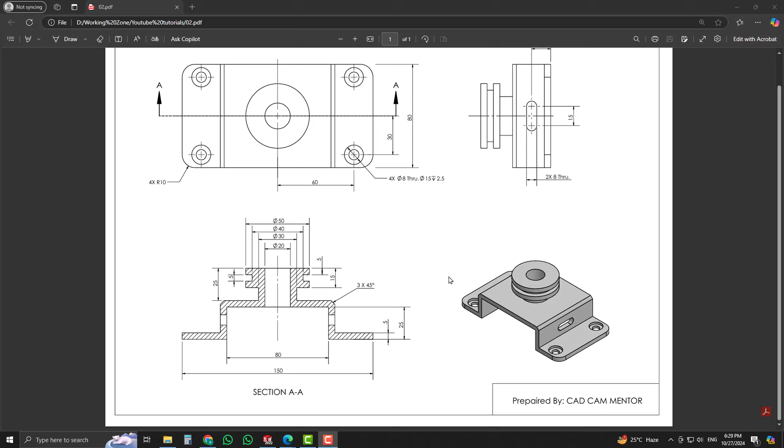SolidWorks 12th lecture. In this lecture, we will draw this simple 3D part with the help of 2D views. First of all, when we look at its isometric view, you can see the support plate. First we will draw the support plate, then we will draw a circular member, then a slot, and finally counterbore holes.

To draw the support plate and the circular member, all of the dimensions are given in that section view, so we should start from there. First, in SolidWorks, start sketching on the front plane and draw a center line like that.

Now we will open the 2D drawing. Here you can see an 80mm dimension from this line to this line, and 150mm dimension from this end to this end. This center line shows that both sides are symmetric, meaning 40mm here and 40mm here. Similarly, for the 150mm, both sides of the center line are symmetric.

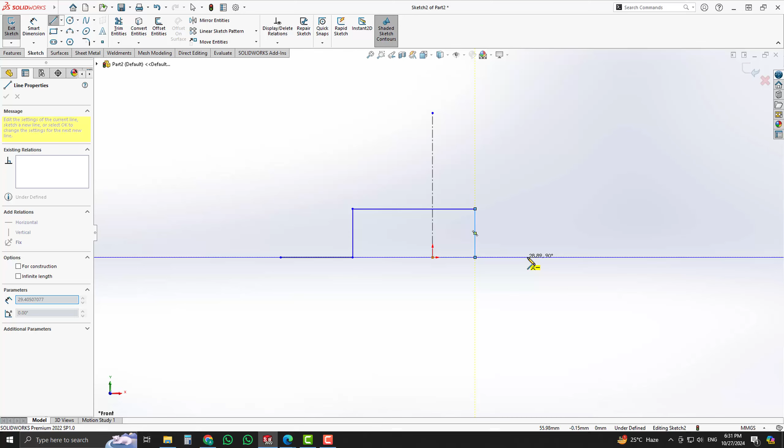Now in SolidWorks we will draw a sketch. First, remember that the starting point of the line should be horizontal with our origin point. Now we will place a sketch like that. First we will place a dimension using smart dimension.

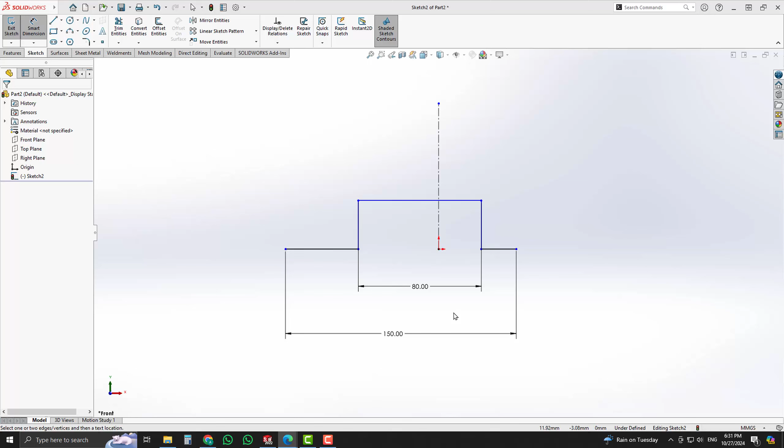From here to here, the dimension is 80mm. After that, from this end to this end, the dimension is 150mm. When we look at the 2D drawing, the distance from this line to this line is 25mm, so we will apply a 25mm dimension from here to here.

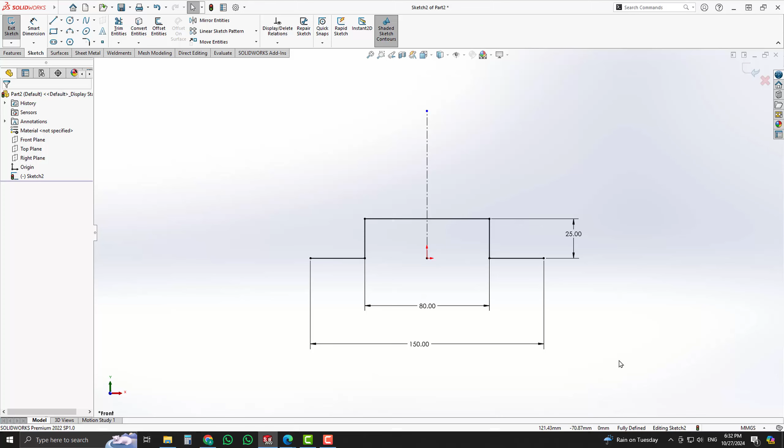Since we have to make these two lines symmetric with the center line, select these three lines by pressing Ctrl and assign a symmetric relation. Similarly, select these two endpoints and the center line and assign a symmetric relation. Now our sketch is completed, and you can see it is fully defined.

Now select the extrude boss base option. As soon as we select it, the thin feature command is activated at the same time. We will reverse the direction, and enter the thickness mentioned in the 2D drawing, which is 5mm. The second thing is how much to extrude it.

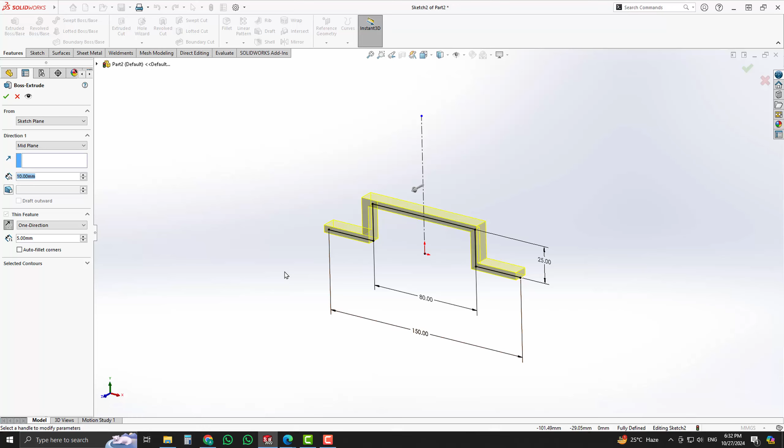For that, we can see in the top view the extrude height is 80mm. In SolidWorks, we will select mid plane so the extrude length in both directions remains the same. Now enter the value 80mm and click OK. Now you can see our support plate is ready.

After that, we will create a middle circular feature. All of the dimensions for that are given here. For making that feature, we will draw a sketch like that in SolidWorks.

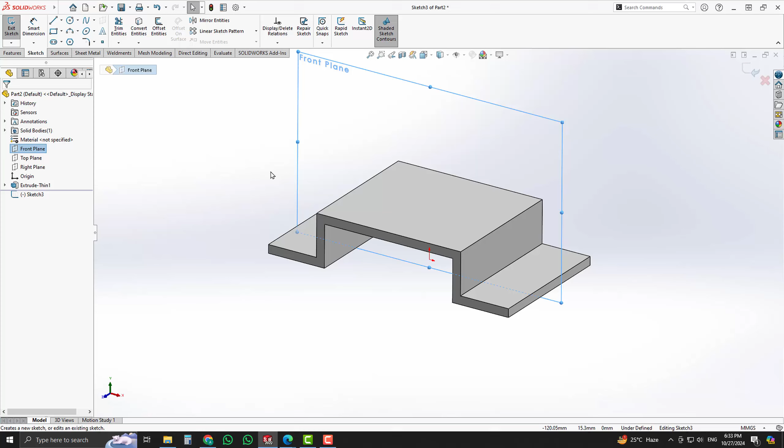Now in SolidWorks, start sketching on the front plane and set the view to the normal position. Again we will draw a center line like that. Select the line and start sketching like that.

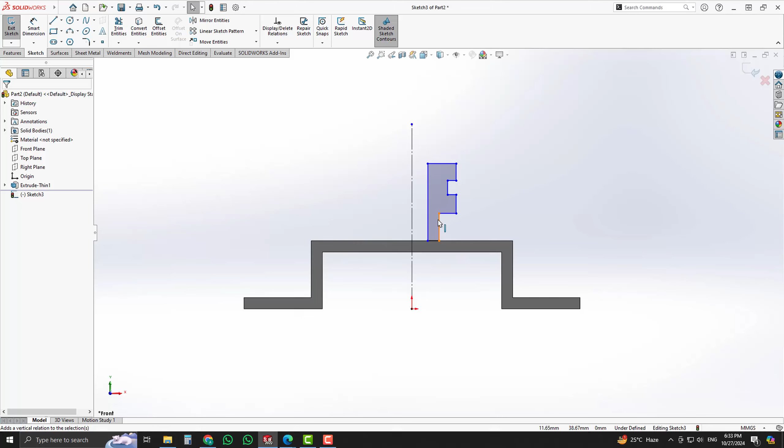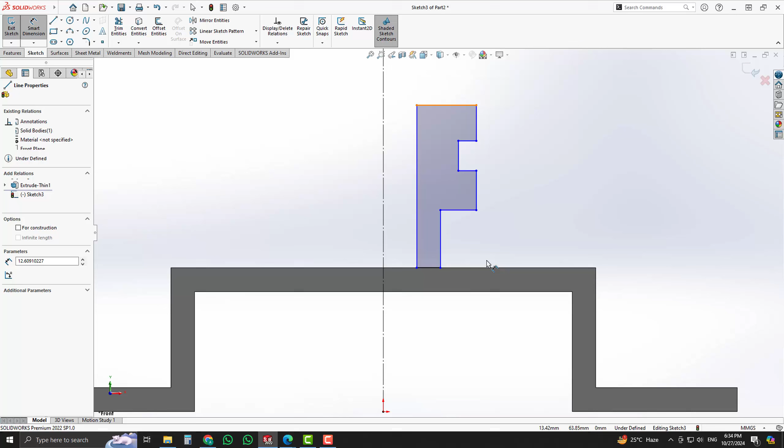Now we have to place dimensions. When we look at the 2D drawing, we know that the 25mm dimension is from this line to this line, and the 5mm line height is mentioned here. That line is 5mm only, and the overall dimension is 15mm.

Now in SolidWorks we will place dimensions one by one. From here to here is 25mm only. From here to here, the dimension is 15mm, and this line is 5mm. Now pick these two lines and assign an equal relation.

Now you can see all of the diameters, 20, 30, 40 and 50 millimeters, are given here, and we will apply these diameters. You can see when we take a dimension from the center line, on this side the dimension is in radius form, and on the other side of the center line the dimension is in diametric form.

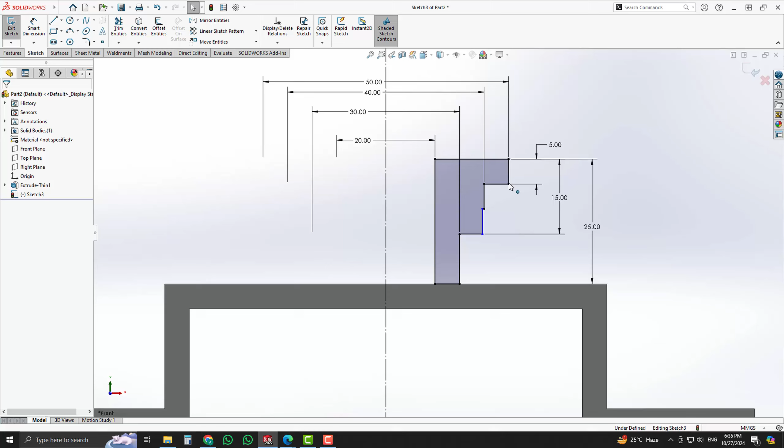Now we will place a dimension in diametric form. The smallest diameter is 20 millimeters, after that the diameter is 30 millimeters, then 40 millimeters, and the final diameter is 50 millimeters. Now you can see these two lines are not collinear with each other. To make them collinear, just select both lines and assign a collinear relation.

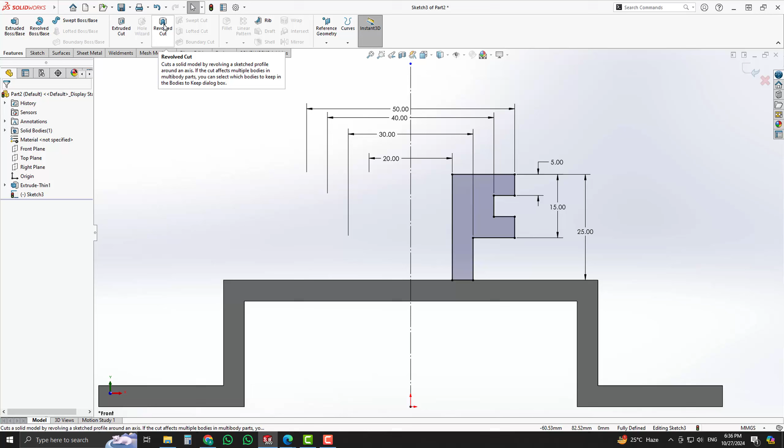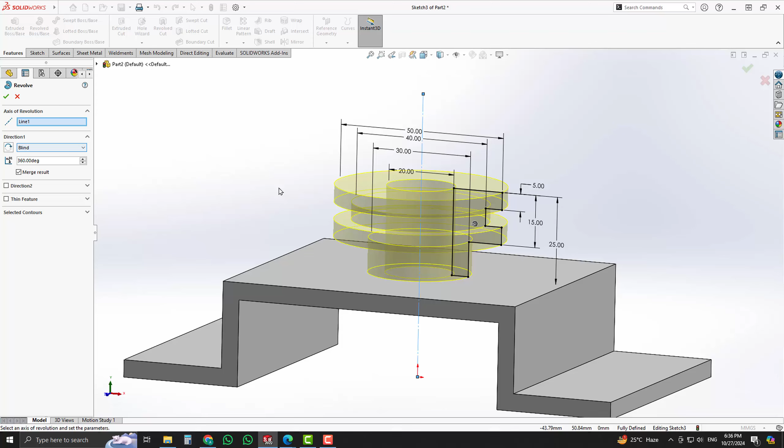Now we will revolve that sketch by using the revolve boss base command along the center line. As soon as you select revolve boss base, our geometry is created successfully along the center line. If you have only one center line, it will select automatically by default, but if you have multiple lines, you have to specify the center line as the axis of revolution for the sketch.

Now you can see our central round part is completed. When we look into our 2D drawing, we know that this hole is through, so we have to cut this hole thoroughly with the help of extrude cut, sketching on the face.

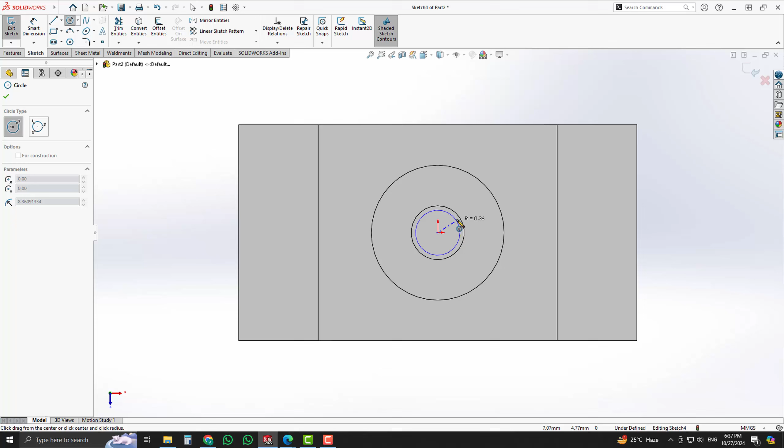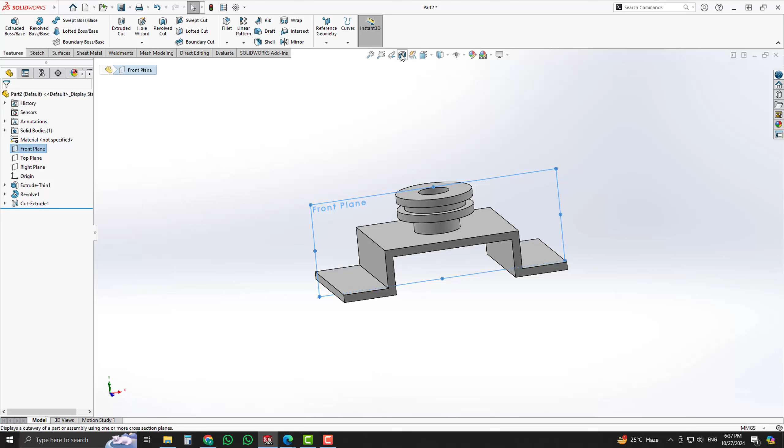Set view to normal position, select the circle command and place it here like that. After that select the extrude cut option, and under direction select up to next. Now you can see the hole is cut thoroughly. We can also look at that with the help of section view.

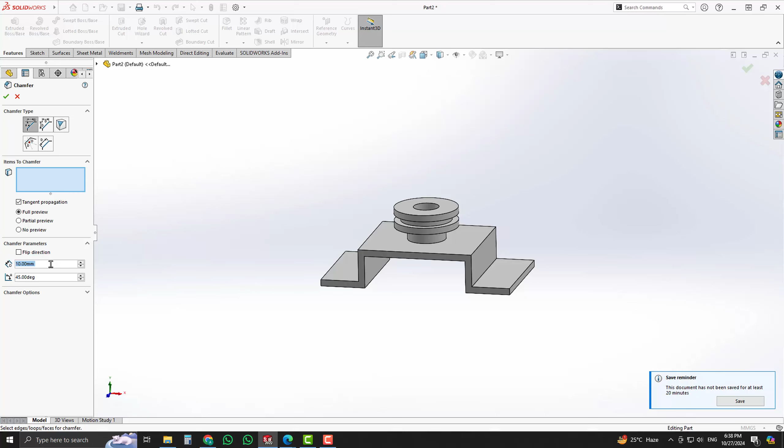Now our geometry is completed successfully. In that same view you can see a chamfer is applied here, 3 into 45 degrees. Now we will apply that chamfer. For applying the chamfer, under features select the chamfer command and enter the dimensions for the chamfer.

After that we select these two edges and click on OK. Now you can see the chamfer is applied successfully. Now we will create the slot.

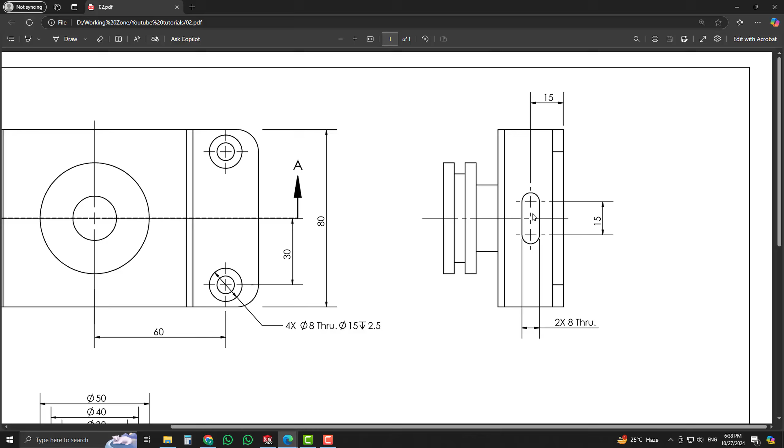Here the dimensions of the slot are given. The slot is 15 millimeters above from the base, and the CC distance of the slot is 15 millimeters. 2 into 8 mm means it's on both sides of our model. Now we will draw the sketch with the help of these dimensions.

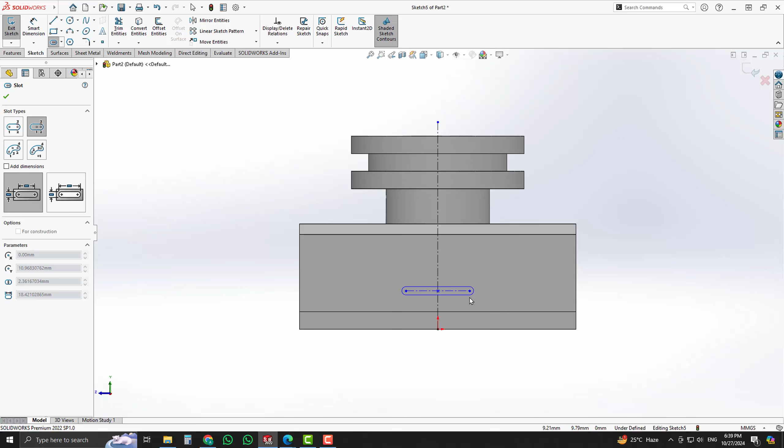In SolidWorks, start sketching on that face. Set view to normal position and place a center line here like that. Now we will choose center line straight slot and place it here like that. Remember that our slot should be horizontal in existing relation.

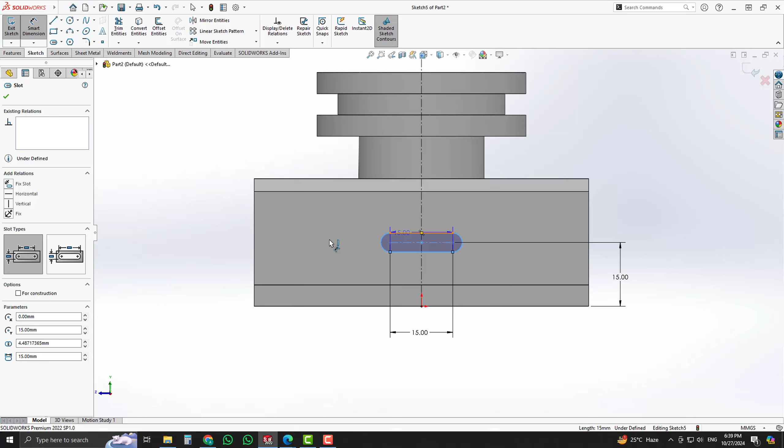Now we will apply dimension with the help of smart dimension. We know that from bottom its dimension is 15 mm and its CC distance dimension is 15 mm also, along with that this dimension is 8 mm only. Now the sketch is completed. Exit sketch and select extrude cut option, and under direction select through all.

Click on OK. Now you can see the slot is formed on both sides of our plate.

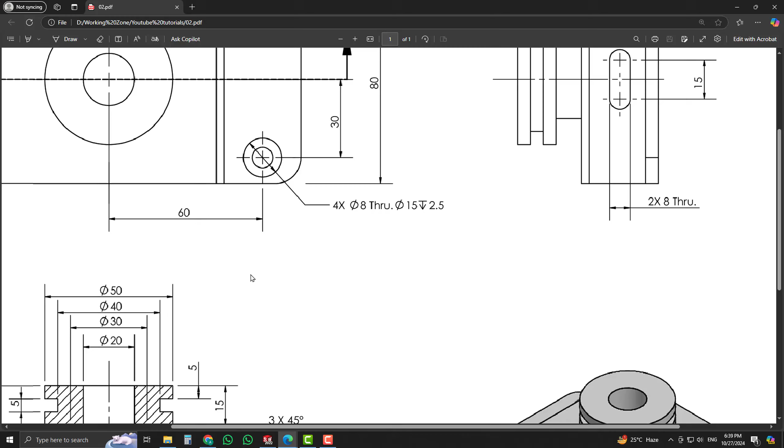Now we will make 4 counter bore holes whose dimensions are given in that 2D view: 4 into dia 8 through, and dia 15 with depth 2.5. It means 4 holes of dia 8 mm are through the plate, and the depth of dia 15 mm is 2.5 only, and its placing dimensions are 60 and 30, horizontal and vertical respectively.

In SolidWorks, start sketching on that face and set view to normal position. First we will draw a circle here. After that, place a dimension of the circle with the help of smart dimension. Place here vertical and horizontal dimensions, and place the circle's dimension, which is 8 mm.

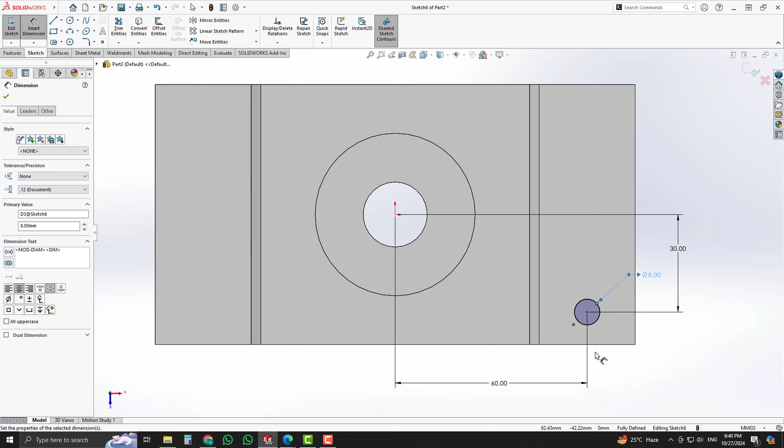Exit sketch and select extrude cut option, and here we will select up to next option. Up to next means up to the next solid wall. Click on OK. Now the hole is placed successfully.

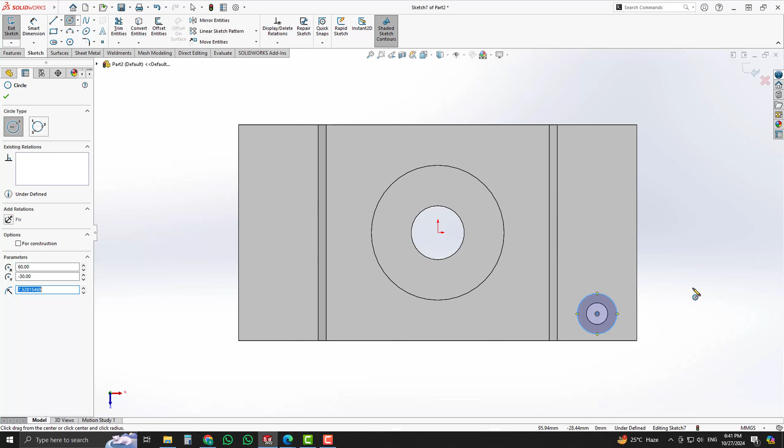Now we will sketch on that same face and set the view to normal position. Place a circle here of 15 mm. Exit sketch and select extrude cut option, and under direction select blind and set the depth 2.5. Click on OK. Now our counter bore hole is completed.

Now simply select both of the extrude cuts and also select the front plane. Along with that, select the mirror command and click on OK. Now you can see the hole feature is mirrored.

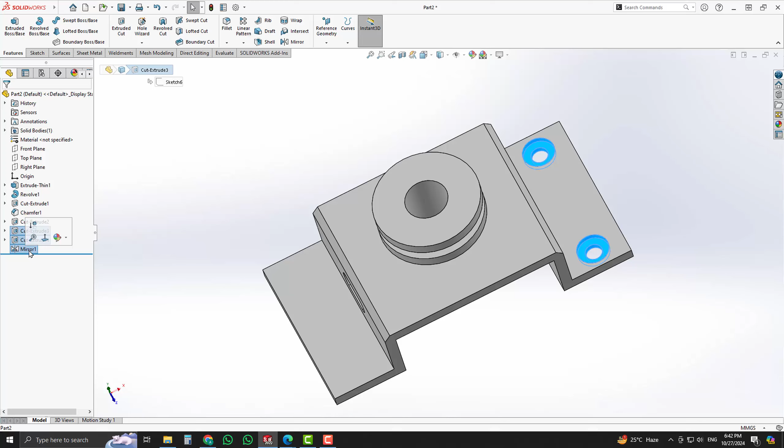Now we will mirror these two holes on the other side of the part. Select these last three features, and along with that also select the right plane and select the mirror command. Click on OK. Now you can see our hole features are mirrored successfully.

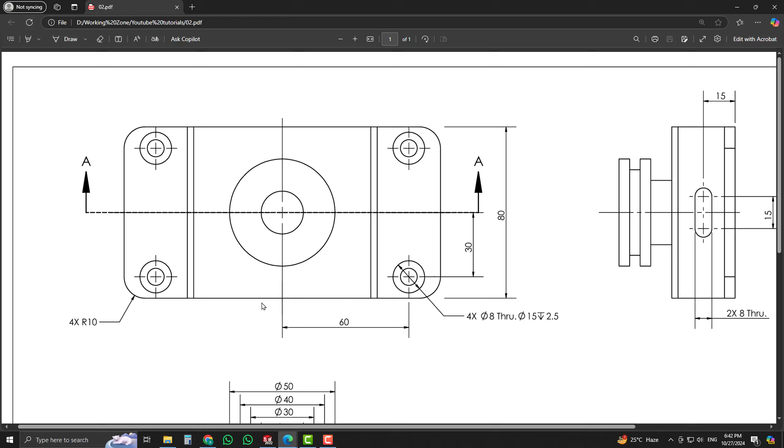Now we will apply fillet. When we look at our drawing, here you can see a fillet radius of 10 mm is applied on 4 corners. We simply apply fillets on 4 corners. Select the fillet command and select these 4 corners. After that, enter the radius value here and click on OK.

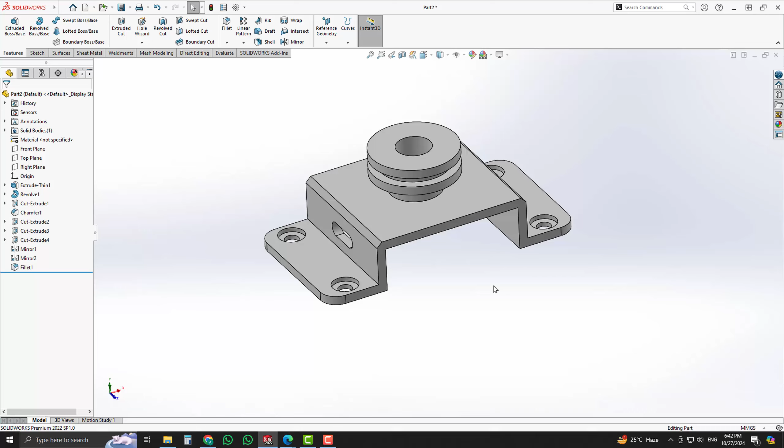Now you can see our 3D model is generated successfully with the help of the 2D drawing.